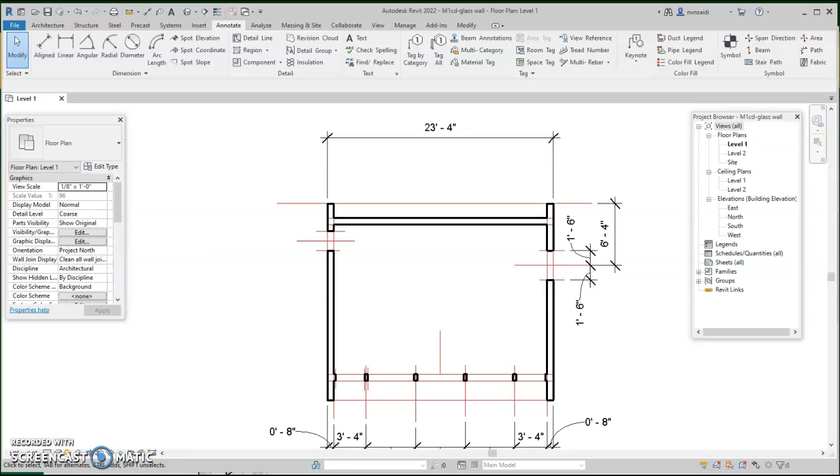Let's work on the fireplace. Once again, we pull the information. The instruction says that we need to find the center line. It's 8 feet 4 inches. So pick this line, offset 8 feet 4 inches. Here's the center line.

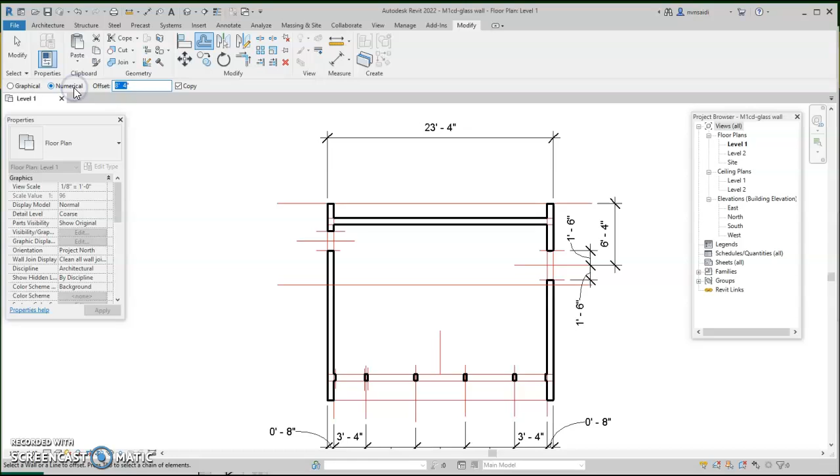The instructions simply suggest that we need to go 1 foot 3 on either side. So 1 foot 3 on either side goes as such, this way and this way. We then, from this junction, annotate, move from this corner back 4 inches.

Let's make sure that our line hierarchy is thin so we can actually see. That's our line. I'm going to erase this line for a second just so you can actually see. If I mirror this line, you can easily see that same line on the other side. I'm going to mirror against this line. That's where I have it.

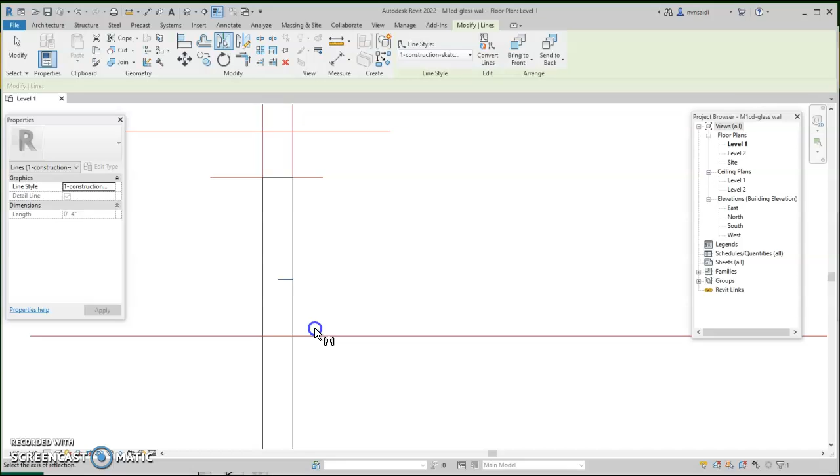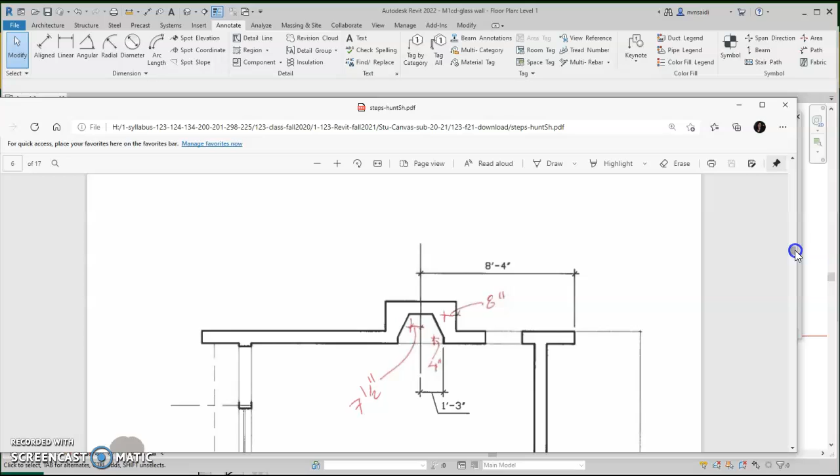If you want, you can turn these two to that nice thick line so we can actually see the construction wall line. Then from this point, I'm going to offset 1 foot 4, I believe. Let's double check. It says from here to here I need to move back, first I need 4 inches, right? And then an additional 1 foot and then 8 inches. So I'm going to offset 1 foot 4.

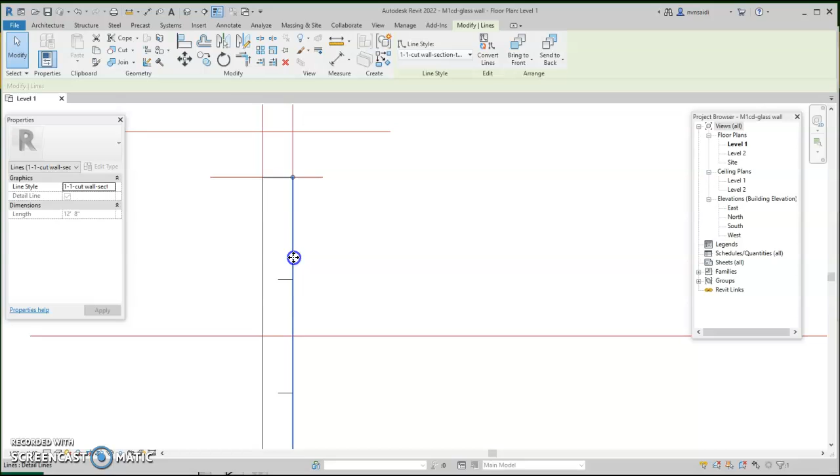And sometimes it's 1 foot 6. So pick this line, offset 1 foot 4, back, it's here. Offset another 8 inches for the thickness of the wall. It's right here. So I'm going to quickly turn these two into the red line so that I can see those as a construction line.

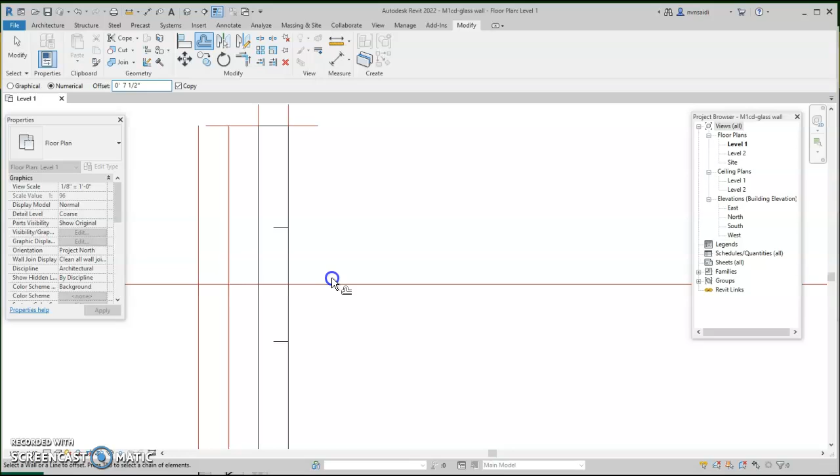Now I'm going to work with these. These, I believe, are 7.5 inches on either side. So from here to here, 7.5 inches. From the center line, I'm going to offset 7.5 inches to either side, here and here.

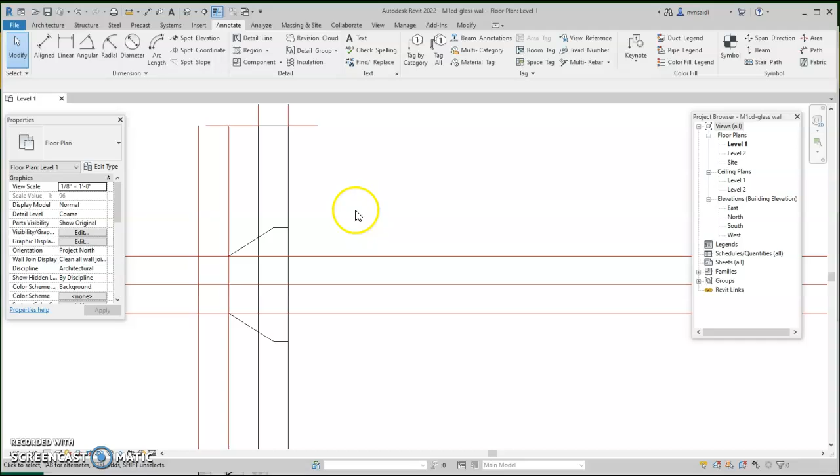Now all I have to do is just connect the line. Annotate, detail line. I'm going to go with the large scale line because I'm ready to actually draw the connection from here to here, back here, and there. That's it. Now all I need to do is just trim this line.

Here's another way of doing it. Rather than trimming it, simply pull it back, draw the line from here to here. And if I draw my lines with a line hierarchy, I can actually see where things are. Now, from this junction, I'm going to draw a line back. I'm going to quickly turn it into red so I can actually see it.

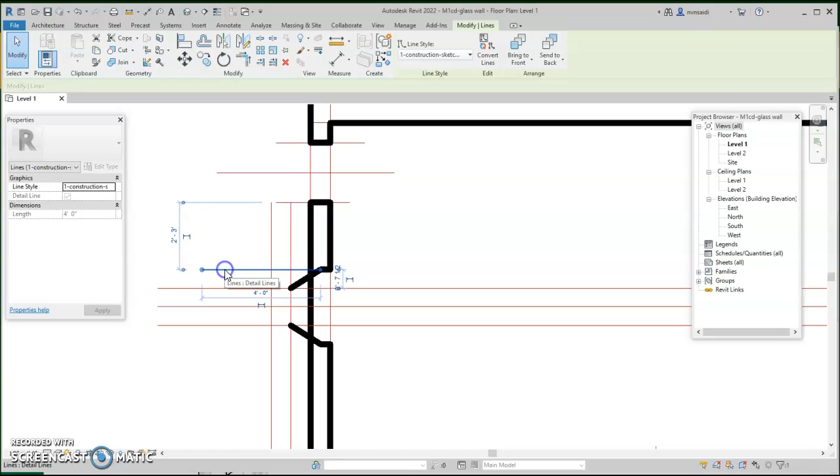So if it's there, I need to get 8 inches. I'm going to take that line, offset the thickness of the wall, 8 inches. Here it is, there's my line. So I can actually annotate this time again with my thick line right from here, there, and I can go to the center line.

Before I do that, I'm going to take this one and mirror it against the center line. Oops, wrong one. Now, choose the correct center line. Pick this line, center against the mirror line. This one. That looks correct.

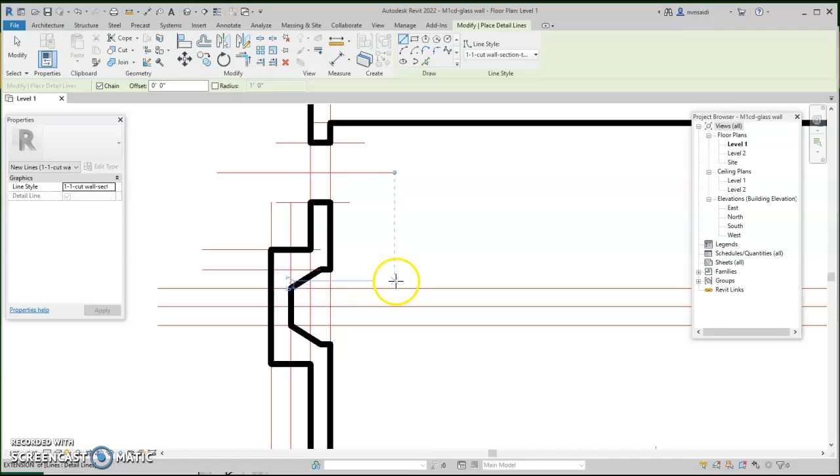Now I finish the back of the fireplace, finish the interior part of the fireplace. You can take this line and pull it back to this junction, and this line went a little bit further. That's more correct. Draw another line, finish this edge. That's how I can finish my fireplace. That's it for this section.